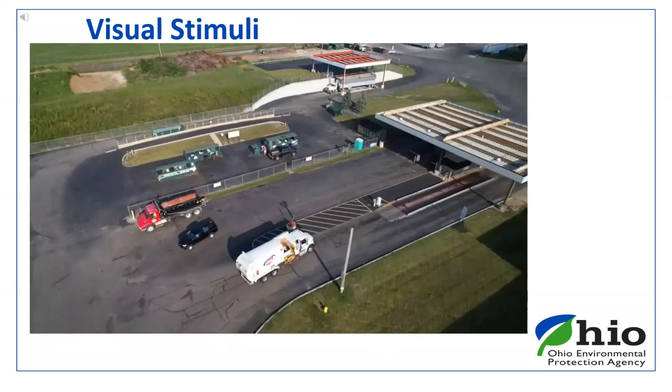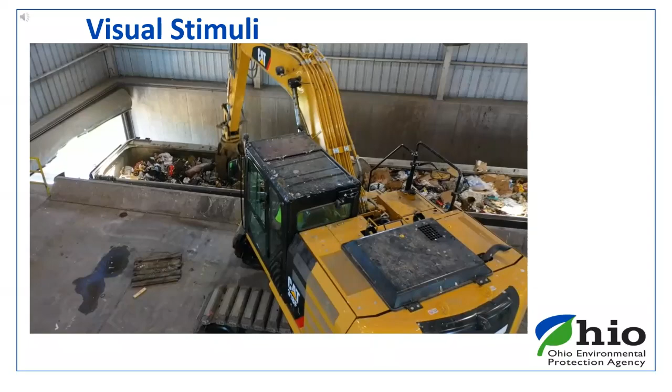Have you ever wondered? Each week we see the trash containers lining the streets. Have you ever wondered what happens to it next? Here in a quiet neighborhood in Troy, Ohio, we see neatly placed carts ready to be picked up. So now what? Enter Troy's side load truck. At the transfer station, we consolidate waste for efficient trucking, thus reducing the amount of vehicles making the trip to the landfill. Here we see a sanitation truck unloading their refuse. It is then pushed into a top-load transfer trailer and tamped for trucking. But this is not the end of the road. Our trash is about to begin its journey to its final destination, the landfill. From here, it will begin a 50-mile journey to Bellefontaine, Ohio, home to Republic's Cherokee Run landfill.

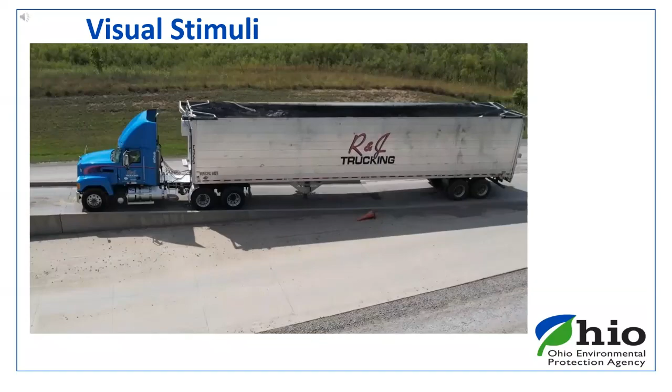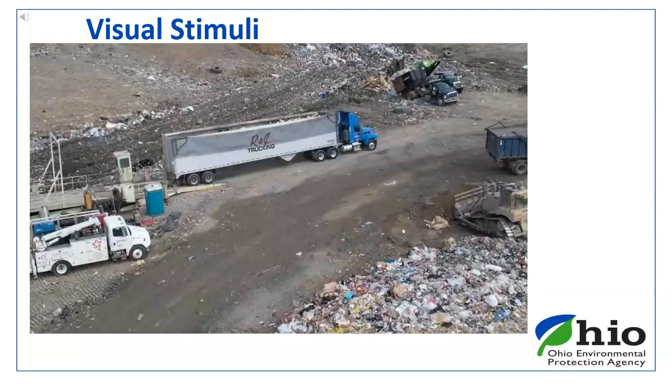After weighing in at the scales, these trucks drive the access lane to the active tipping site. Near the trailer tipper, the driver untarps the load and backs onto the trailer tipper. Disconnecting the truck, this machine lifts the trailer up to unload.

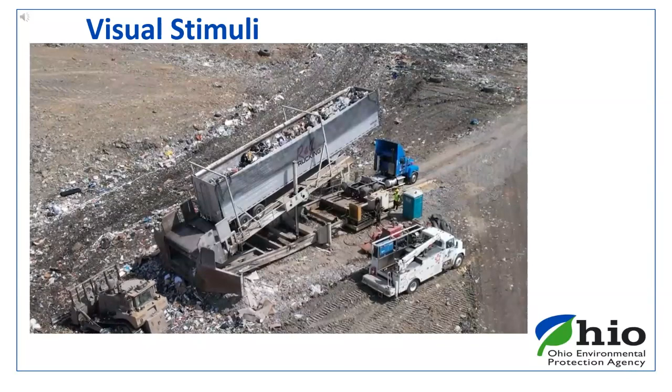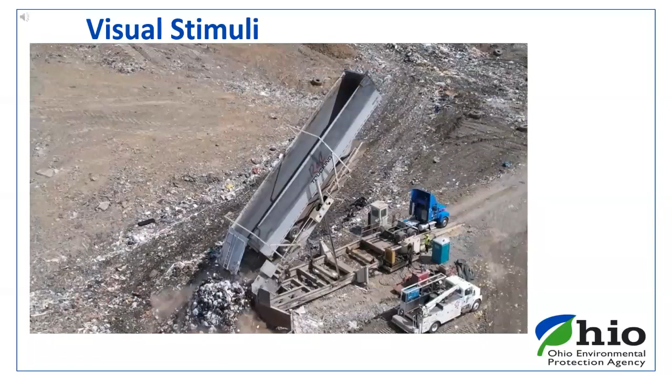As the trailer is lowered down, the compactors and bulldozers come in to level the refuse and compact it to conserve space.

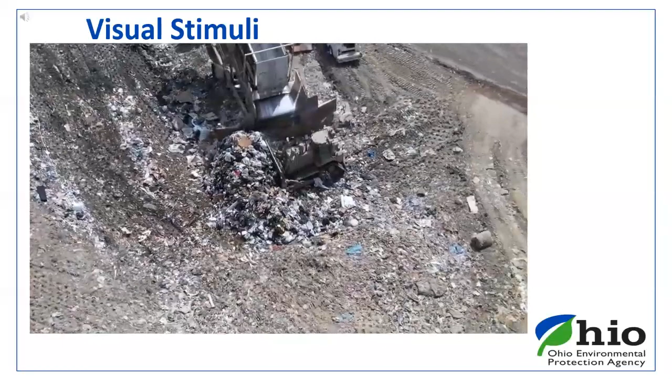Cherokee Run is the contracted landfill with Miami County to accept all of our refuse. Even with the current tonnage being hauled to the facility daily, life expectancy is more than 20 years.

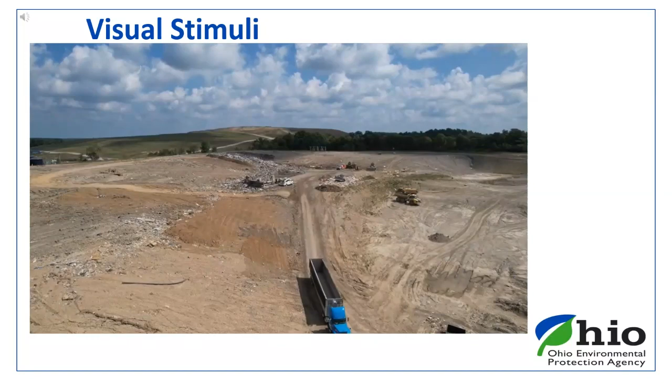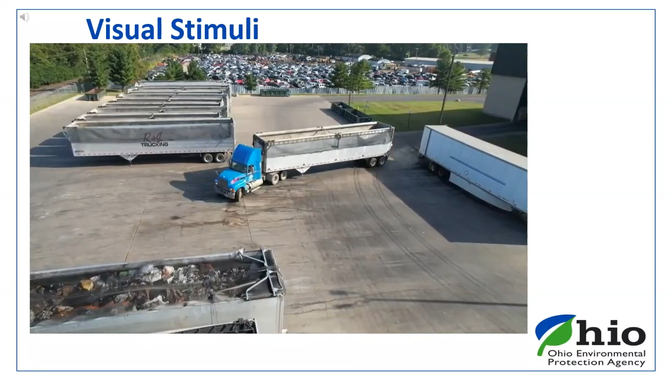The Miami County Solid Waste District is committed to its recycling programs to aid in landfill reduction. Working with residents, commerce, and industry, Miami County is meeting or exceeding its recycling goals as outlined by the Ohio EPA. Thank you for taking the journey with us today, watching our refuse go from curbside, through the countryside, to the landfill. We hope you have enjoyed watching this.

I hope you all found that video as educational and entertaining as I did the very first time I saw it. Very quickly, let's shift focus and cover some things that are not transfer facilities. This will be covered more in depth later on, but I wanted to hit some highlights.

One would be a facility that consists solely of portable containers with an aggregate volume of 50 cubic yards or less. This means waste transferred from one small container to another, with no waste sitting on the ground. Another would be any facility where legitimate recycling activities are conducted.

There are some caveats and specificity to this one I won't be going into at this time. As you can understand, what exactly constitutes a legitimate recycling facility would be a presentation unto itself.

Another highlight is any facility that accepts scrap tires, other than scrap tires that are incidental to solid waste shipments. What that latter half means is they're allowed to have a couple of scrap tires in their solid waste loads that had to be segregated, but not whole loads of scrap tires.

Scrap tires are considered solid waste. However, they have their own special set of rules and dedicated facilities that are completely distinct from transfer facilities. As above, there's enough detail to that which could constitute a presentation on its own.

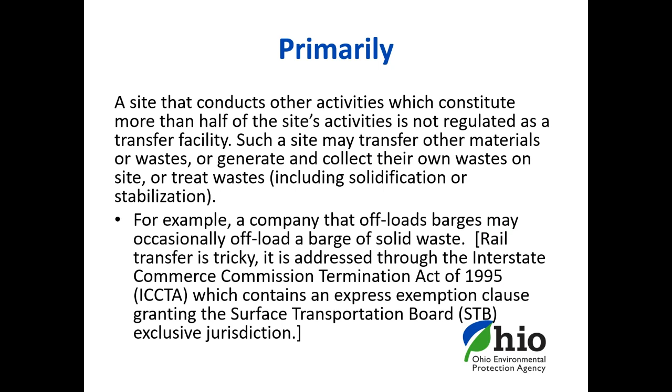As an aside, rail facilities are a bit more complicated. They may tick all the boxes for being a solid waste transfer facility, but there are federal statutes that make things a bit tricky, and we need to go through our legal section to figure out if that site is within our jurisdiction or not. So rail transfer points may just be a little more difficult or surprising when it comes to figuring out if they are a solid waste transfer facility.

Another tricky situation that may come up under that primarily umbrella is if, and I don't know how many cities in Ohio have this issue, there are cities where the garbage truck can't actually make it down the street or the alley. So they have a smaller vehicle go down, collect the trash, bring it out to a larger vehicle, and transfer that waste from one vehicle into the other. But where they transfer that waste may not be the primary purpose of that location. If they're doing it in a vacant lot, parking lot, or side of the road, it's not fenced off and isn't the only thing that happens there, so that would not trigger being a transfer facility, even though transfer activities are occurring. But if there is a fence and that's all they do, then you can start looking at other exclusions, like that 50 cubic yard exclusion. This is an issue that had come up, and this is our response, just in case you have this where you are working.

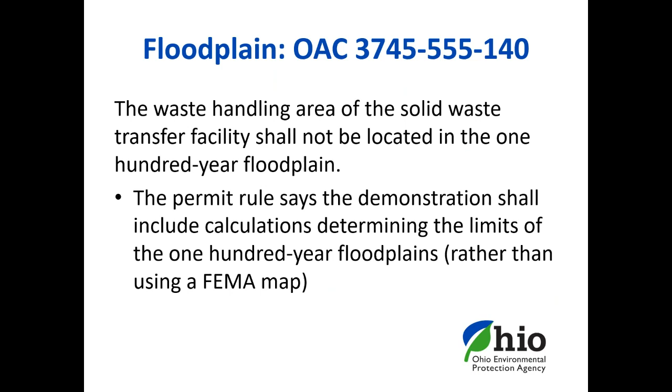And the last siting criterion is for surface water. These are all the surface waters that are not natural areas, and there is a 200-foot setback from these surface waters.

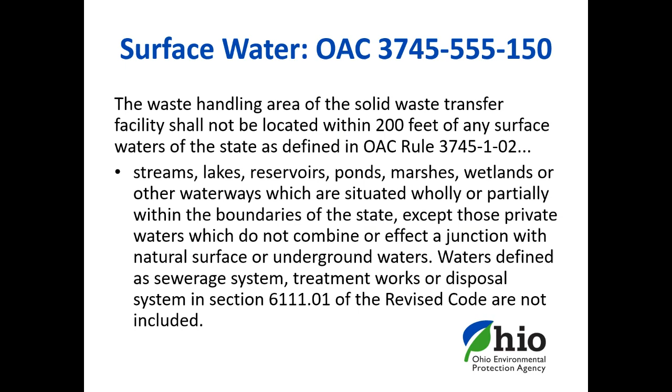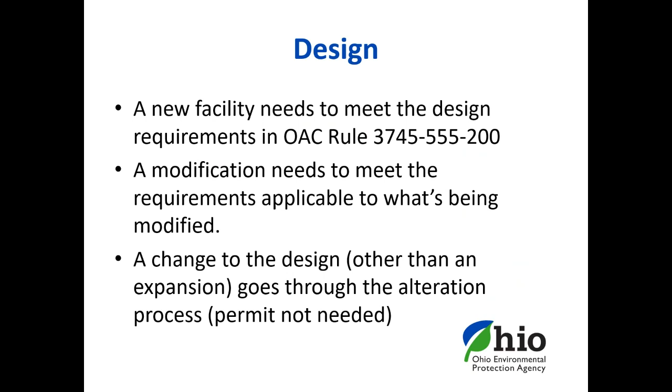We have some design specifications that apply to transfer facilities. A new facility would need to meet all those design specifications. If they're modifying something, they just need to make sure that what they're modifying meets the rule requirements. Other than that, if they make a change that's not a modification, it still needs to come through the agency—just not through a permit, but through an alteration.

The first design specification is that the transfer operation needs to be in a building—that means floor, walls, and a roof. As to the floor, we pay a lot of attention to its durability, and then how leachate is collected and managed through the sloping of the floor, how it's collected through floor drains, and the like.

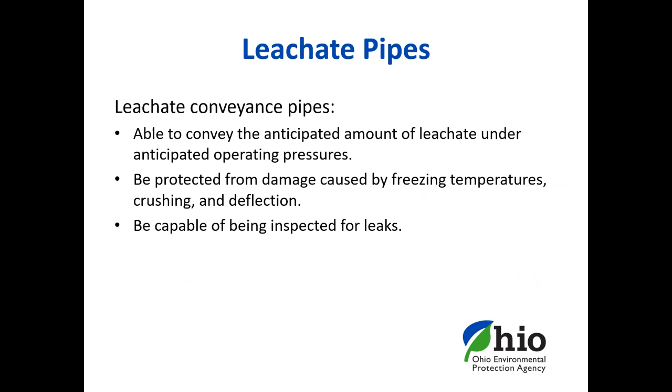More on leachate management: we have specifications for any leachate pipes, that they be sized correctly, that they're not going to break easily, and that they can be easily inspected for leakage. Lastly, if they need a tank for leachate storage, we have specifications for that too. If it's a metal tank, it needs corrosion protection. For load-out facilities, that needs to be protected from freezing and from being knocked about through facility operations, so it's not going to be leaky. And if it does have a spill, the spill will be contained.

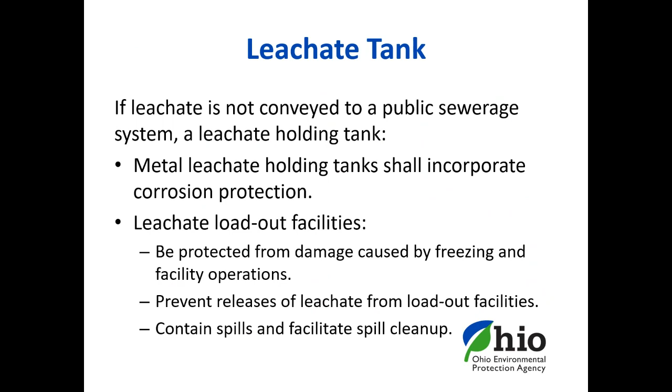And we have an 'or other' category. So if there's some special feature added to the transfer facility that is integral to the function of a required engineered component—something to do with the building, the floor, leachate pipes, or leachate tank—we can add that and apply our oversight.

Construction certification reports, inspection, maintenance, that type of thing would apply to that additional or other item. For example, the structure—and I don't know anybody doing this or proposing it, but let's say they wanted a 3-sided structure and used an air curtain for the fourth wall. That whole apparatus to maintain the air curtain would then become one of these 'othered' engineered structures under our regulations.

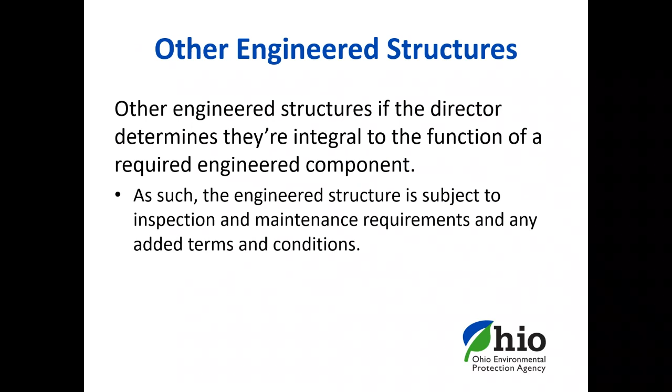Some items that are not engineered components, often associated with transfer activities, are balers, shredders, compactors, conveyors, the dozer type equipment, fire suppression—any of that kind of stuff are not engineered components. I point that out in particular because some of our older permits required that information be provided, but we don't do that any longer.

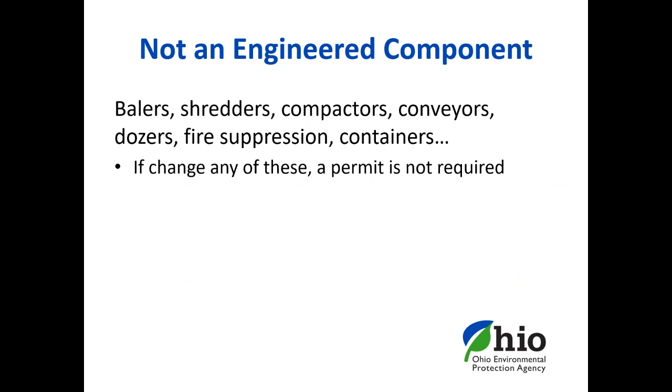Besides siting and design, we also look at financial assurance as part of the permit. The financial assurance cost for closure includes disposal of the solid waste, disposal of the leachate, and cleaning up the facility. If that calculation comes to less than $5,000, we do not require the applicant to actually obtain financial assurance for that. We have discovered that financial assurance is expensive and often costs about $5,000.

So it just didn't seem worth it for the applicant to obtain financial assurance when the cost of the financial assurance may very well be more expensive than the actual cost of closing the facility. Plus, we figure we can find $5,000 should they walk away from the facility, and we're left to basically clean up that situation.

The last thing I want to say about permits and the permit process is public involvement, which for transfer facilities is a little bit different than what we do for landfills—if you're familiar with landfills, it's not exactly the same. Transfer facilities do have an applicants meeting. Optional is the Ohio EPA public information session. Also optional is the public hearing. And then, of course, the entity, the public, or the health department could appeal a decision of the agency.

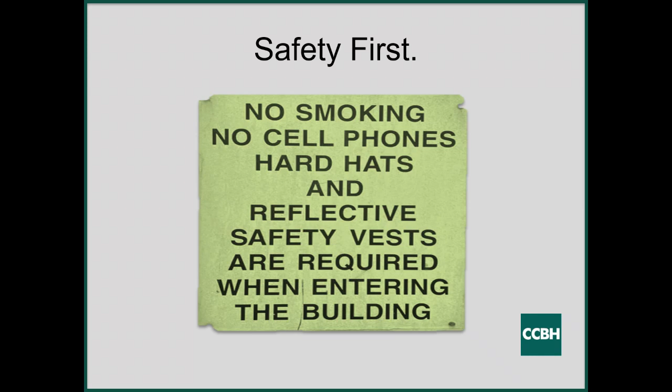During the inspection, it could be helpful to use the transfer station checklist, which you can get off the EPA website. It's a great reference to refer to during the inspection process.

The first thing you need to check during the administrative portion of the inspection is making sure that there's an approved copy of a permit on site. If it applies, also make sure that you're aware of any current terms and conditions and that they're being followed. Newer facilities will need a PTO, or a permit to operate - those are only applicable after initial rules became effective. Any list of alterations - that's where the owner or operator of the facility may request changes to the authorizing document.

What does the contingency plan include? During the inspection, you need to speak with the operator and go over the contingency plan. This plan needs to be easily accessible in a binder and available for inspection. The date needs to be most current, updated with any new changes.

What's required in the plan is how to handle unauthorized waste, burning, or dusty material. It also needs to include how to handle an event such as a fire, explosion, or spill, or if a piece of equipment becomes inoperable. If these parameters cannot be met, then a plan needs to be in place stating how the transfer station will meet the compliance by handling and removing of solid waste.

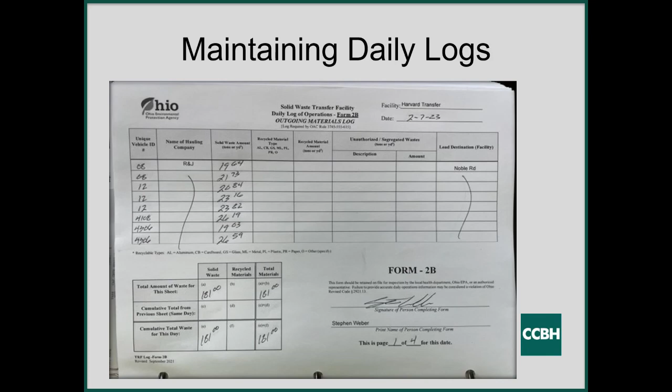With the potential of leachate, a visual inspection needs to be done to be sure it's not making its way to clean surface water or the storm sewer. As a reminder, leachate is any water that comes in contact with solid waste. The waste handling area should not be located within 200 feet of any surface waters of the state. Many facilities control leachate from going off-site by using an oil water separator or discharging to the sanitary sewer. It's also vital to check the sewer grates for any potential blockages and that the oil water separator is being properly maintained.

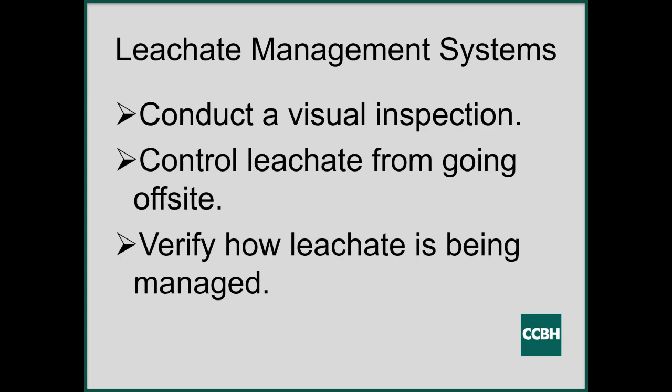Posted instructions are crucial. Instructions are to be at the entrance of the transfer station with a list of prohibited wastes. The signage needs to be in good repair and easily legible. A list of prohibited waste includes hazardous waste, asbestos-containing waste material, radioactive waste, untreated infectious waste, waste containing liquids, tires, tree stumps, batteries, yard waste, oil, and large pieces of concrete. Also, it's important to be sure that all emergency contacts are up to date and accurate.

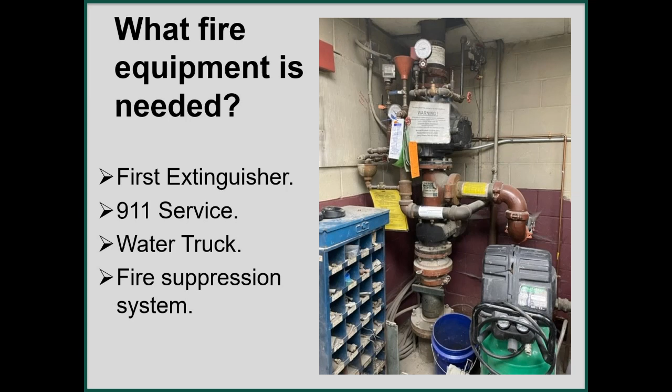While inspecting used motor oil, it's important to check the containers and above ground tanks that they're not leaking. Also make sure the containers are properly labeled with the common name used oil. It's also important to document in the daily logs the type of oil, the amount, and the destination where it's going.

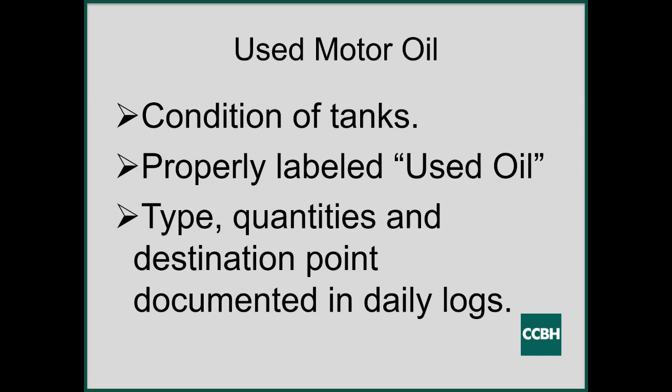There should be no tires present. All tires need to be segregated from the trash and properly stored and not collecting water. They should be dry at all times. The storage container bins must have a cover and treated with larvicide or pesticides for mosquitoes. Once the bin is full, an EPA registered transporter will pick up the container. The mosquito control records are to be noted in the daily logs as well.

Batteries are not to be accepted. Batteries must be separated from the regular loads and transferred to a recycling area. In addition, the batteries need to be documented in the daily logs, indicating the amount, the type, and destination.

Yard waste as well may not be mixed with trash. It needs to be kept in a separate area, or some facilities have a compactor. Eventually, yard waste is sent to a compost site. The type, the amount, and destination also needs to be documented on daily logs.

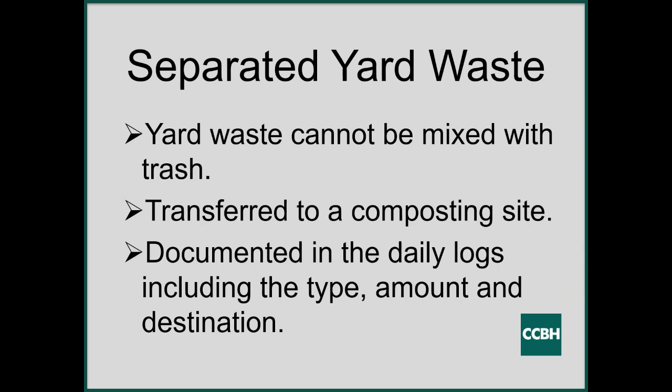The owner or operator are required to maintain access roads to the transfer station during all weather conditions and reduce erosion and dust. A gate needs to be provided to prevent unauthorized access during non-operating hours. Also, it's important that clear instructions are posted at the gate stating a list of prohibited types of waste, yard waste restrictions, and current emergency contacts. The emergency contacts needed include the fire department, local health department, local law enforcement, and the Ohio EPA emergency 24-hour spill line.

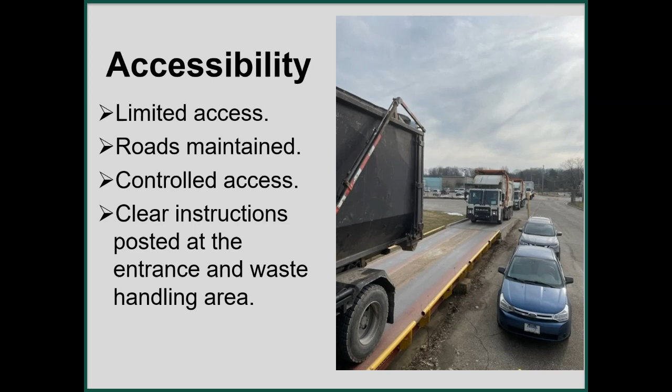During the waste handling inspection, floors need to be properly maintained on a daily basis by controlling dust, odors, and vectors with adequate equipment on site. This includes regular cleaning and disinfecting of surfaces. To prevent rodent harborage, an integrated pest control management should be in place by using baiting stations and traps as needed. As far as litter that's being scattered, it's important that it's being picked up on a daily basis as needed. Also making sure tarps are secured on the trucks and perimeter landscaping is provided to catch any airborne litter.

With the design of the waste floor, it should be constructed to prevent infiltration of leachate into the ground. The floor should be sloped to direct the leachate towards collection points and not allow any ponding. To prevent any kind of odors, a general rule should be that operation procedures can help by first in, first out waste handling to keep on-site trash on the garage floor for short periods of time. Also, watering and deodorizing systems can be helpful as well.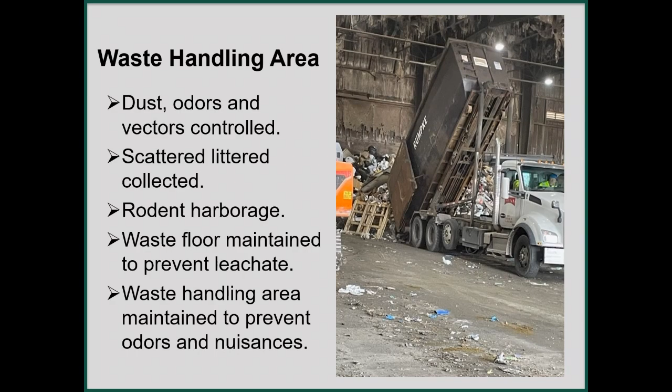Requirements for newly constructed or modified facilities include changes after April 1st, 2017. Some of those changes include waste handling areas need to be enclosed, and the floors need to be designed to handle large loads, force and demands, and a leachate collection system.

So at the end of the survey, you need to discuss with the person in charge the findings and provide a copy of the inspection within 30 days, if not sooner.

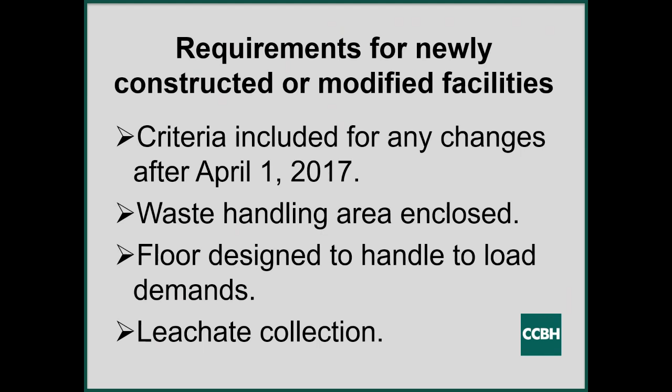Great, thank you, Heather. So we do have a couple questions. The first one I am seeing is, you mentioned yard waste cannot be mixed with trash. Is this referring to bagged yard waste that may be loose, or is it a combination of the two?

Thank you, Leanne. The answer would be both, actually. If it could be identified as yard waste, then it's supposed to be separated out, and it is required to go to a compost site. Follow that, then make sure that the facility is documenting it on the daily log.

Okay, and then we'll follow up with the question that came in during some of the other presentations. What are some of the common issues that are found at transfer stations for inspectors?

We don't tend to get a lot of complaints within our jurisdiction. Occasionally we can get odor complaints, and then we'll go out on the complaint to make sure how they're taking care of the problem and what the culprit is to it.

Also, it could be a rodent harborage, so you tend to see rats on the floors of the transfer stations. We make sure that they have an integrated pest management control practice in place. Most of our facilities are contracted out with a pest control company to do that, so bait boxes are placed on the floor within the transfer station with bait to take care of the rats.

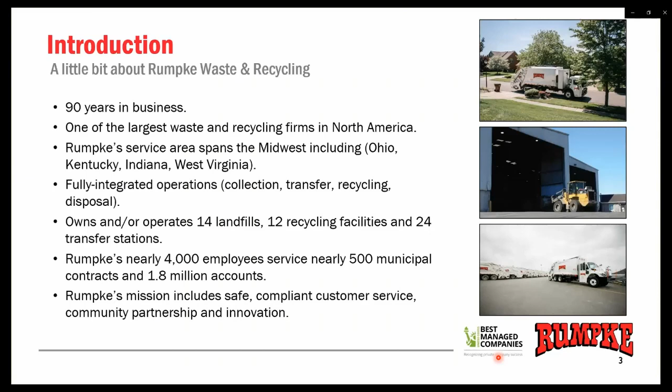Transfer stations are permitted and regulated facilities. As Annette spoke to earlier, there are laws and regulations that show how these are to be built and operated. They are considered the best available technology for how waste is collected and moved to its final location. They consolidate loads from the collection vehicles you see in your neighborhoods into larger transfer trailers to more efficiently haul that waste or recycling the distance to the regional landfill or recycling center.

It's critical to understand that no waste is disposed of at these facilities. Waste and recycling are continuously transferred off-site on a first in, first out basis. Transfer stations are located to provide a convenient disposal location to communities, citizens, and businesses. Recycling centers and landfills are regional service destinations that can't be located close to every business and citizen, nor is it optimal to locate them there. Transfer stations provide that local resource to conveniently get to, promoting proper disposal and recycling.

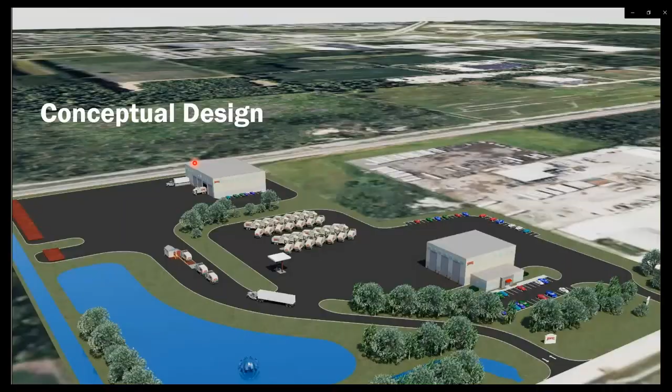This is a conceptual design for another facility we are currently working to site. Again, this is a co-located facility with the hauling company in the front, the transfer station in the rear, a scale for the truck traffic, and a citizens area for their convenience and safety, kept away from the commercial operation of the transfer station.

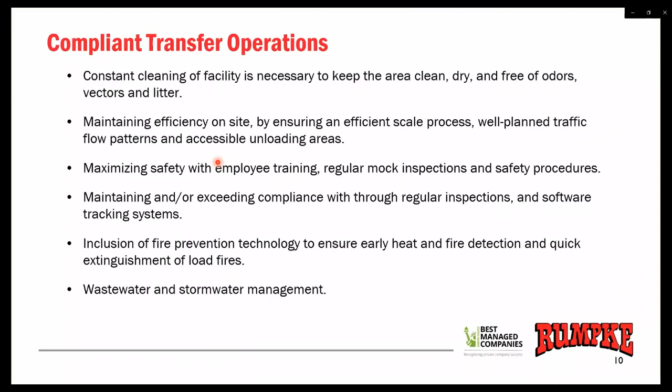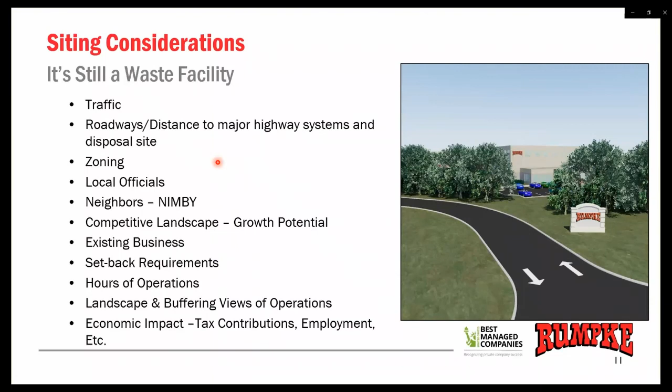Thank you very much for allowing me to present today. I would now like to take any questions.

Thank you, Chris. So the first question I have is: do you take special waste or sludges at your transfer stations? Rumpke policy is not to take either of these at our transfer stations. As the prior presenters spoke to, there are a lot of rules and regulations, and some of the big ones are just cleanliness and odors. By taking these, it only provides more hurdles to be compliant. So our policy is to take these directly from the location to the regional landfill.

Then I have another one: what is the biggest objection you hear from the public? Their biggest worry when we look to site these is the traffic. They're very concerned about more trucks going to a transfer station, and then the semis that would then be leaving from there. That's why it's very important to put these in the right location, in a heavy industrial area that already has a lot of this type of traffic, and to do a proper traffic study so that we have the information to share with residents that it will fit in this area. It will not be a burden to them, but traffic is by far the biggest concern we hear.